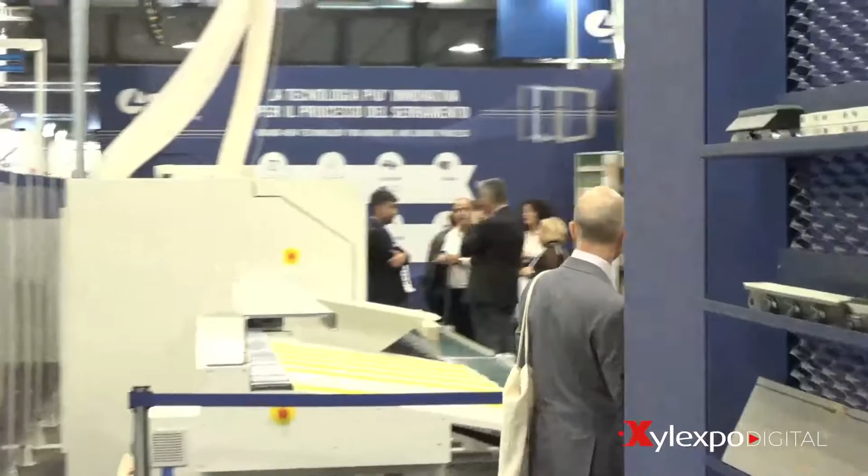We're here with Marketing Director Walter Biagi. Good morning, everybody. I've been working for 20 years at SCM and I'm a marketing manager for solid wood solutions. Let's go inside our booth.

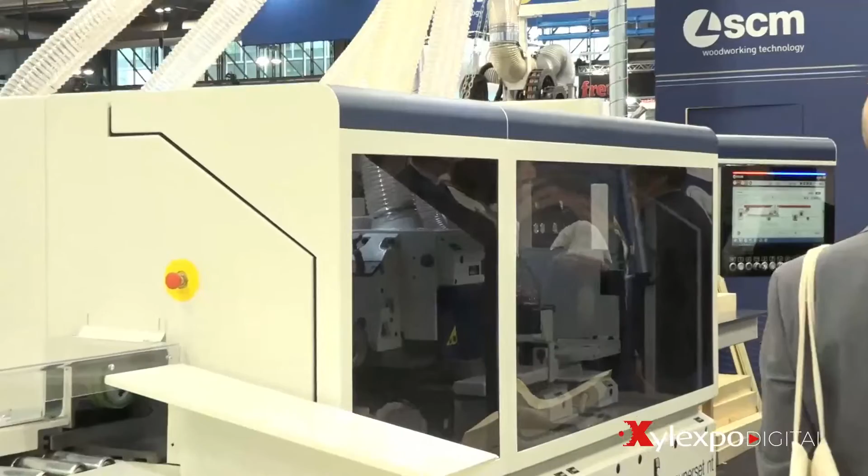We have here our first solution presented at the fairground. We're talking about planing. This is the model which is most sold, the Superset NT, so it's an interesting evolution. We focused a lot on ergonomics and flexibility of use.

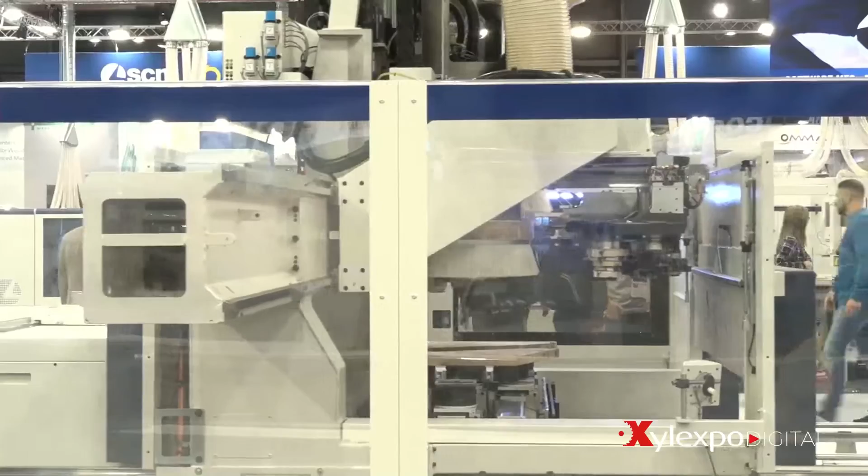It's not easy technology, so the setup must be followed constantly when setting up the machine. We've developed a number of functions helping this pathway, making the machine extremely intuitive and easy to set, with the goal to achieve the best possible result in terms of finishing, performance, and productivity. So this solution specifically...

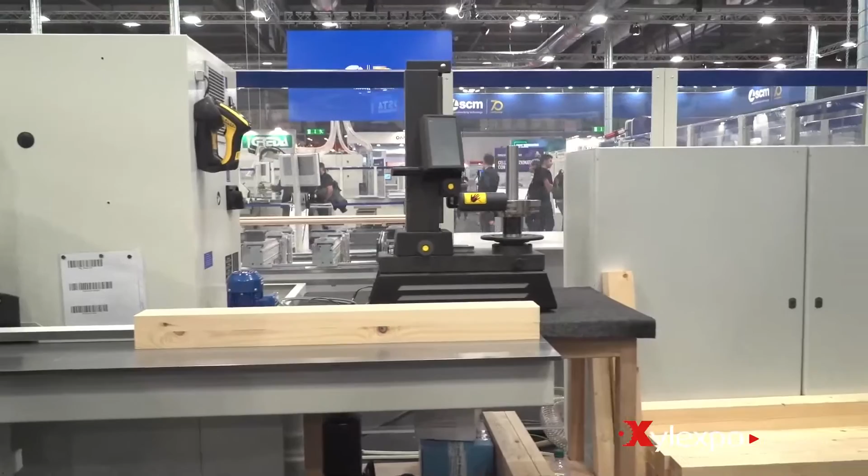From the moment when the tool is purchased, you can read its characteristics using this preset, which is found at the head of the machine. Once the main characteristics have been read, they are transferred directly to the supervisor, which is Maestro 4-Side.

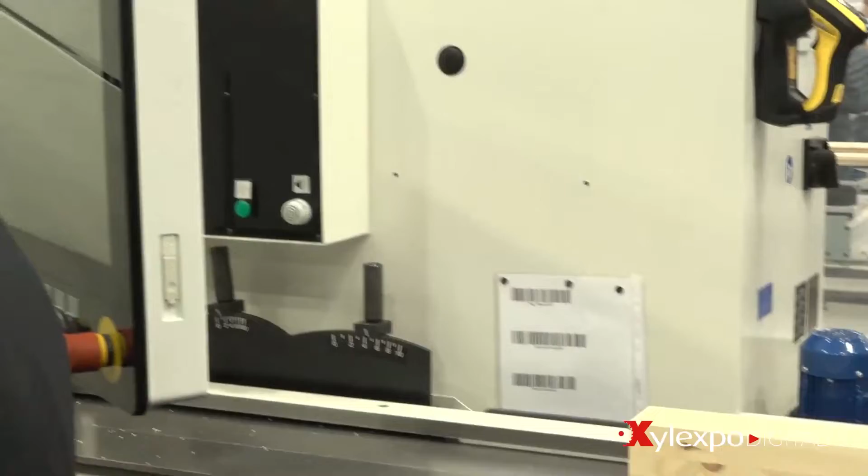It has the same user experience as the interfaces we use within the SCM Group, so they are extremely intuitive and easy to use. This is just to give you a taste of what intuitivity can be in the use of this machine. Next step, follow me.

So this line of products, machining centers, were thought for making chairs, but more in general, they're thought to meet design needs, because we see there's an interesting trend going. Customers increasingly ask to be able to realize design items, valuable objects, with important working volumes, major ones.

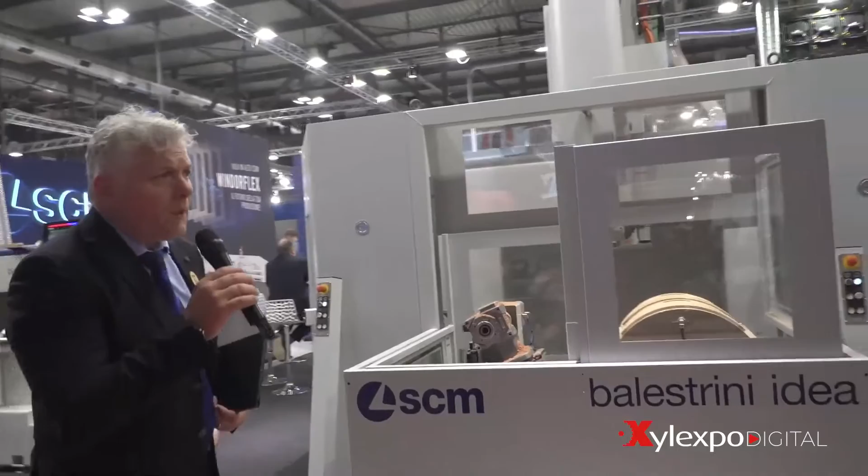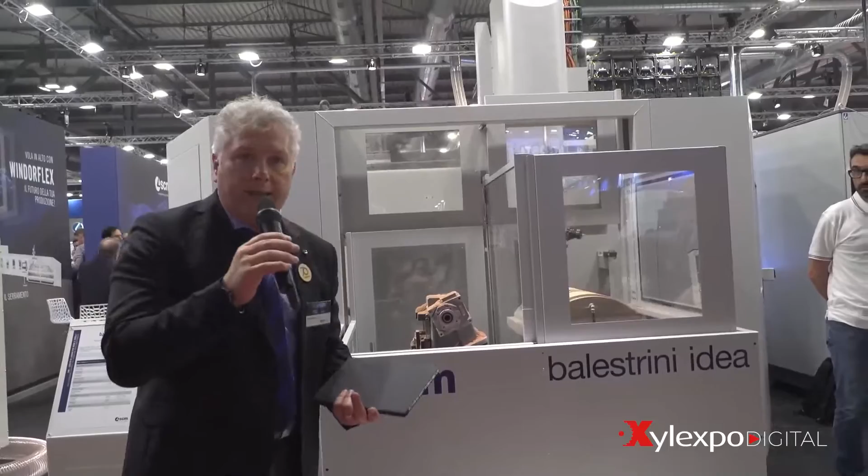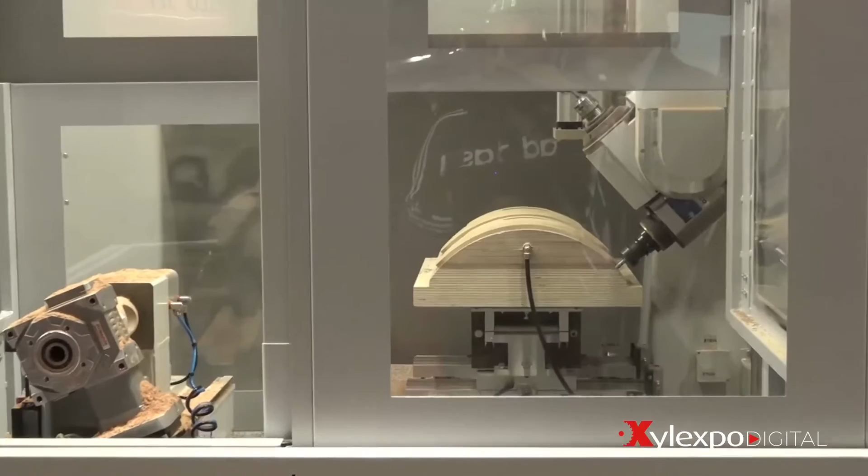This is Balestrini Idea, a 5-axis head with 3 exits, extremely flexible, and it's equipped to do two different wood processing tasks. On the one hand, it's the back of the chair, and on the other side we have a rotating head, so to make objects.

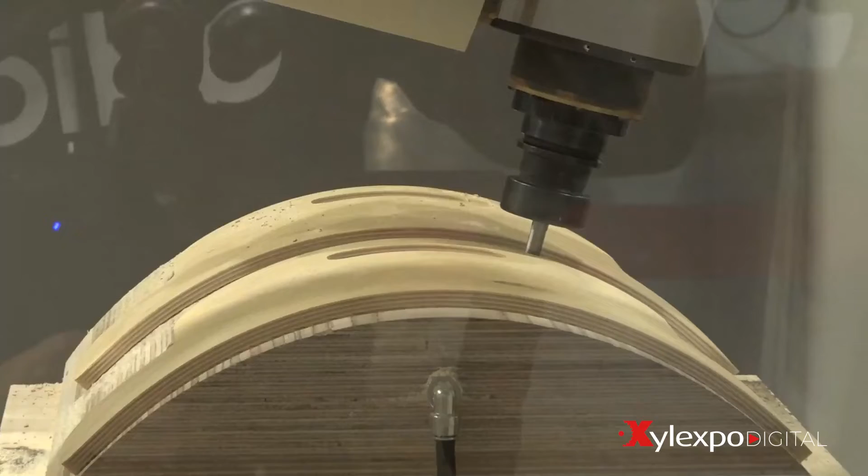This is a gadget, for instance, but you can make chair legs, so it's any kind of small furniture item. It is well appreciated for its compact size. But then there are areas where the runs are much more in terms of numbers.

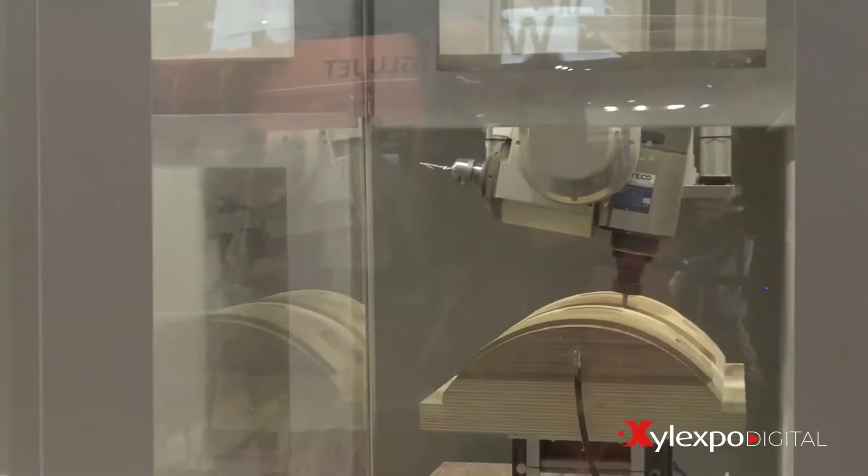We have a totally cabineted solution for major volumes, to make staircases, furniture items of 100 different kinds. So this is for craftsmen, really, craftsmen entering the CNC machining world for the first time.

Yes, it's like first purchase machinery, but whoever uses it still has to have a culture of woodworking. It has to be a craftsman with experience, and the craftsman's experience coupled with our solutions and software available on the market means they can program the machine very easily and transfer their own knowledge into the machine and software. So yes, it's still a CNC machining center, and it's quite evolved in its kind.

Then we can switch gears here. Here we have another machine, totally different from the previous one. It was thought for specific functions.

The PICO word, so it's a solution meeting a specific need, which is to make joints, like in the world of chairs, but the world of cabinets as well. When I think about doors, 5-element doors, I need to make joints between studs and beams.

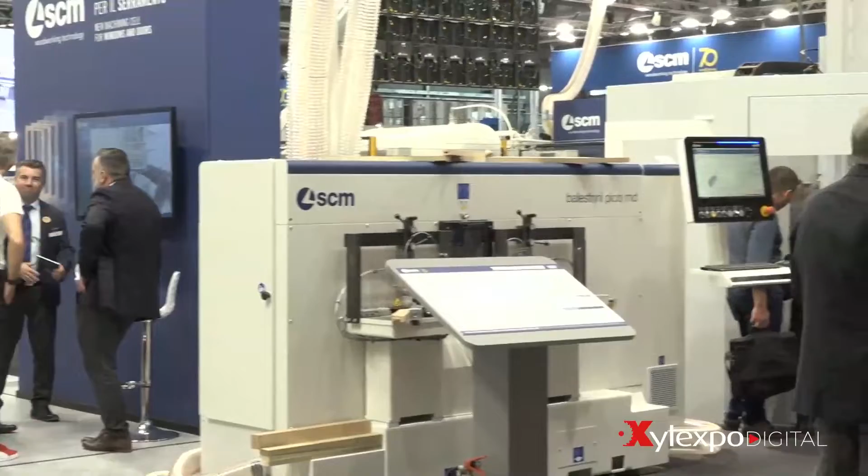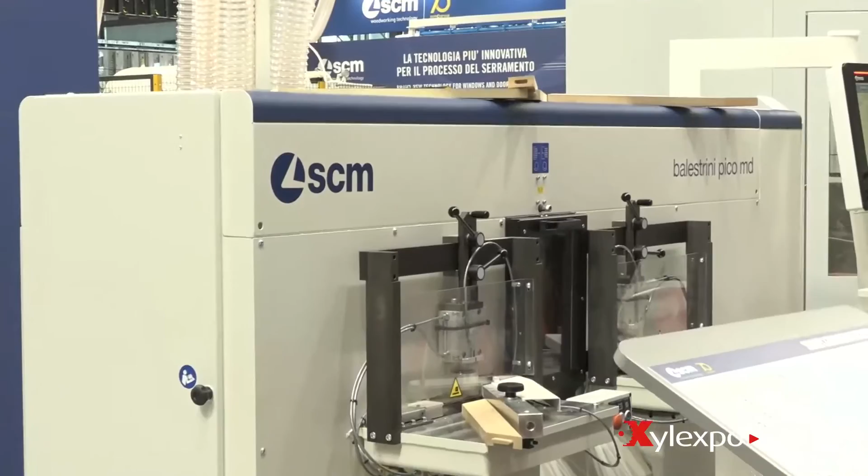I would conclude this tour for solid wood working, stopping here at this panel. This is where we present our latest innovation, a very important project that SCM Group has been investing a lot in over the last years.

A new machining cell for windows and doors, it's called WindowFlex, and it's conceived and thought for craftsmen and window manufacturers that need flexibility, but are also looking for a simple and fast solution to be able to transfer their purchase orders into a finished product.

This flexible cell was developed along 3 lines of direction. The first one was to have solutions, clamping systems that can allow you to fix the window in a solid, stable way, with excellent finishing and the same blocking system, whether we talk about European, Scandinavian or Anglo-Saxon windows, which are notoriously very different from one another. So this is the first point.

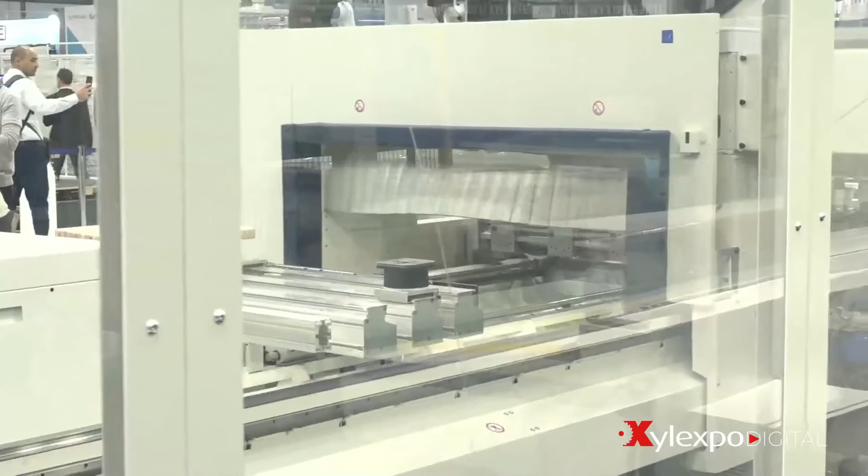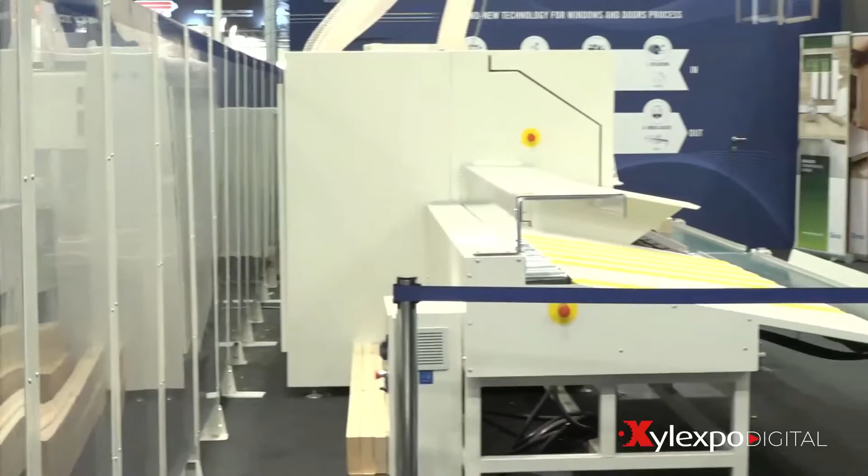So the entire first decade of the 21st century was dedicated to productivity. We want to go back to that history. We go back to our customers, but we now offer the natural evolution of that pathway. After 15 or 20 years of use of systems that have made history, now for the same customers, we have thought of a new solution, a flexible machining cell like WindowFlex.

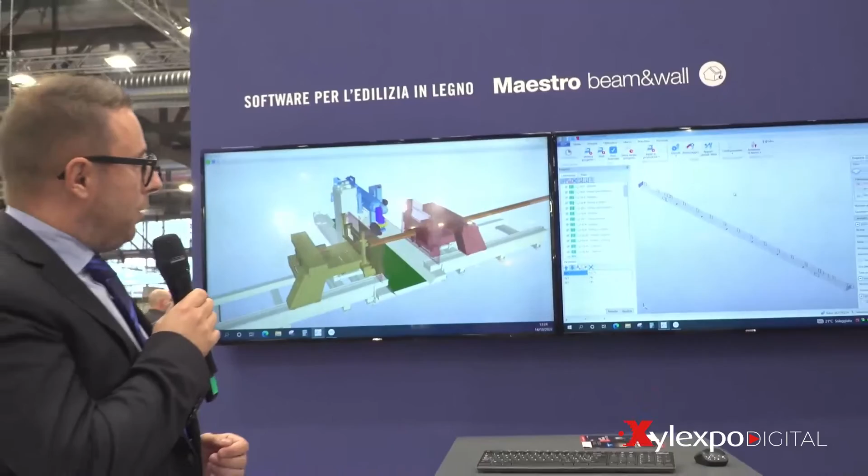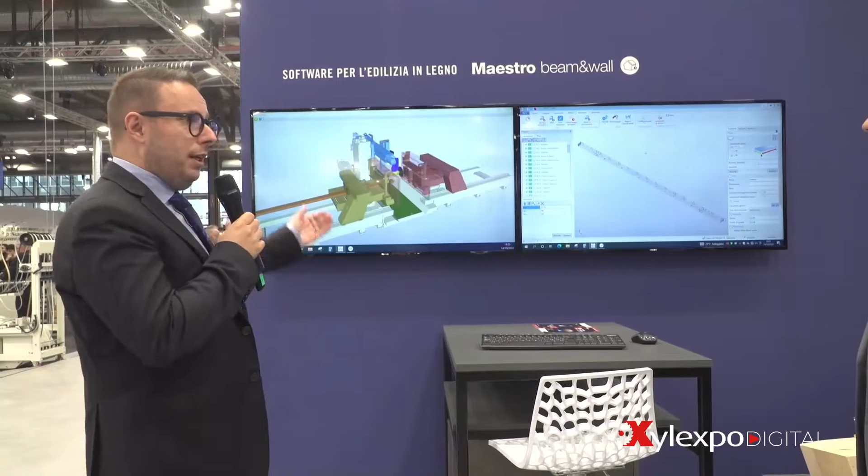This is the program interface used by our customers. So we have design features, a file is then exported - it can be automatically exported - and we can process the entire project. The programming occurs automatically. Here you can see the simulation of the workflow, of the working process that is then done by the machine. Anything that I have programmed in the software is actually problem-free when I get to the production phase.

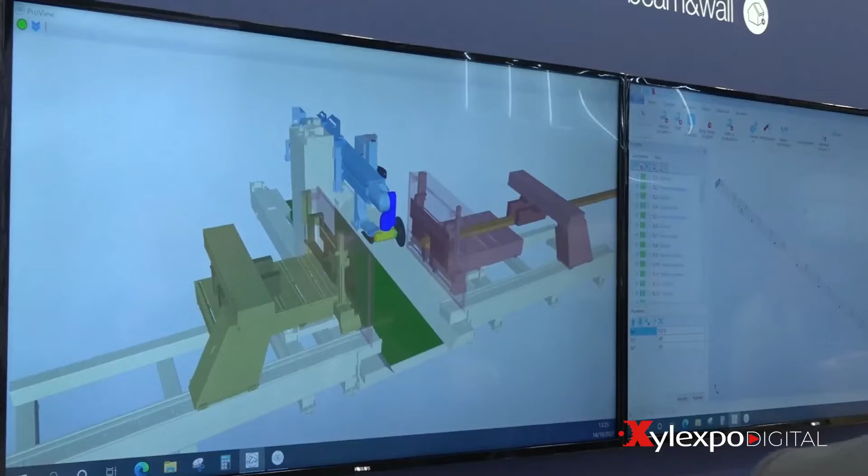This prevents any downtime of the machine. On the other hand, this system allows us to calculate better manufacturing times, and it helps to better manage all the production-related commitments.

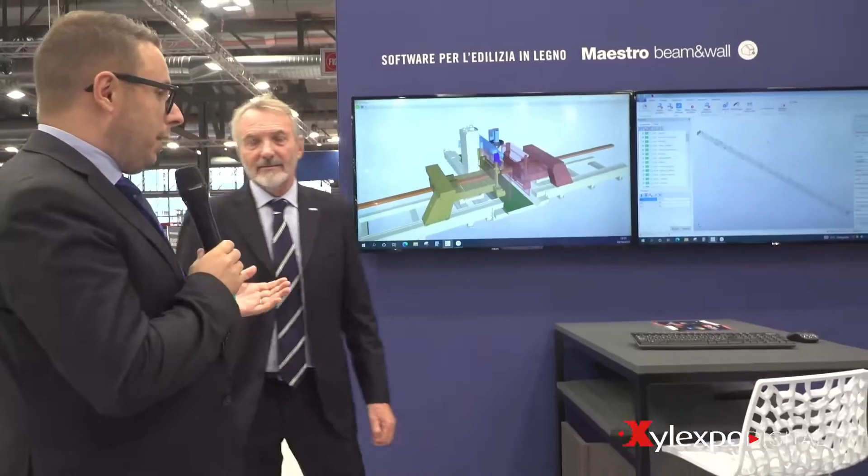What markets are you targeting, Italy too, with this new machine? Yes, we are also targeting Italy as a market. Italy does have a very long tradition - wooden-made roofs have a long tradition in Italy - but now there are new evolving markets. The North American market, for example, where we're really growing in high numbers. The utilization of wood for multi-story building is growing in North America, and this is extremely important. There is a strong push towards better eco-friendliness, and nowadays regulations allow buildings up to 18 stories high, so that's why demand is growing up to 18 floors.

And that's where we are going to record remarkable growth, hopefully not just in this market but in Europe too. Let's talk about France, for example. France has set some constraints on CO2 production, so building companies have to build with wood. And then there are also other markets that are important - we have the Asian market, with a lot of installations in Japan, which is still an important end consumer market for SCM.

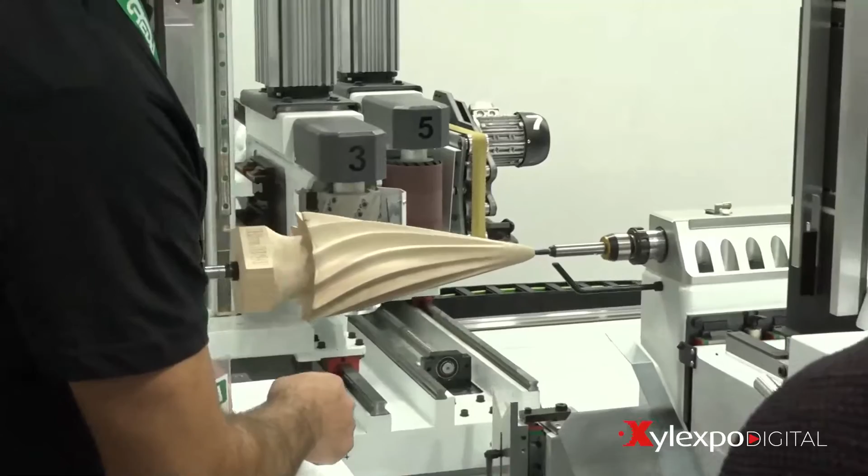Good morning and welcome to our booth. We're happy to be back live in person. Due to various reasons we couldn't be together, and I'm happy to see you back here. We have a Pocket V5, a lathe turning machine with 5 axes. Basically, several solutions for milling, cutting, and sanding are brought together into one single machine. It's a 5-axis machine. Let's get closer to our machine so that you can see it better.

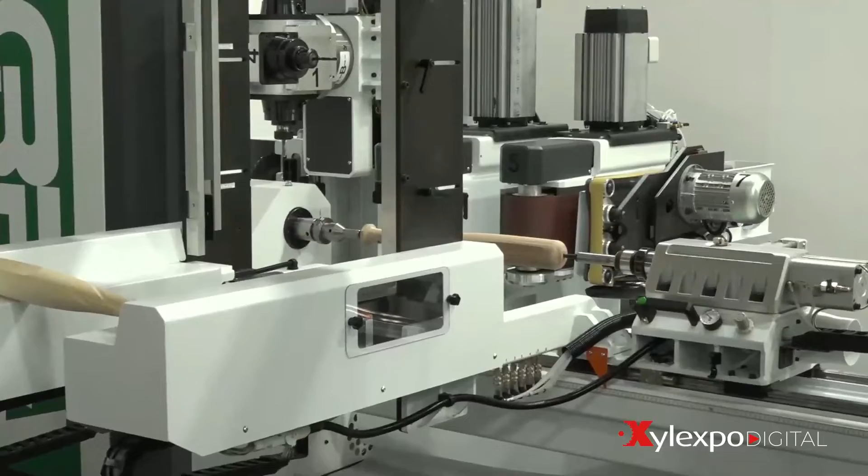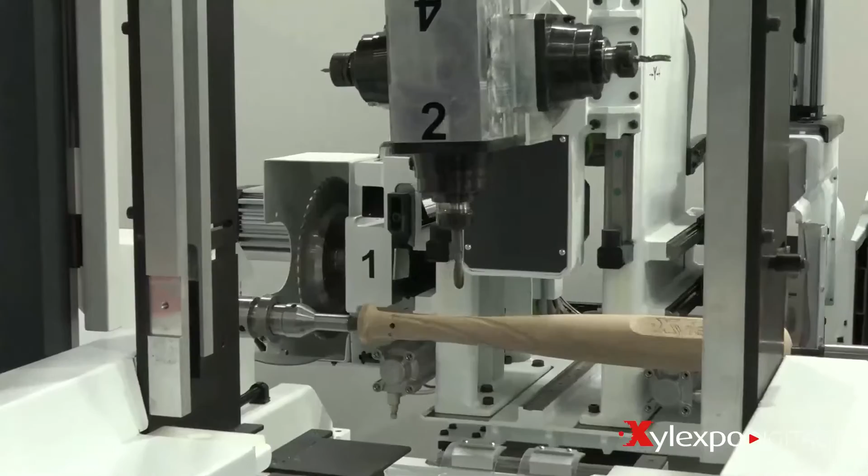This is a turning and cutting machine, 5 axes. So many different processes from cutting to sanding and other axis-based processes can be accomplished. It's a small working island where the operator basically watches over the machine for the offloading phase, and then the machine works automatically.

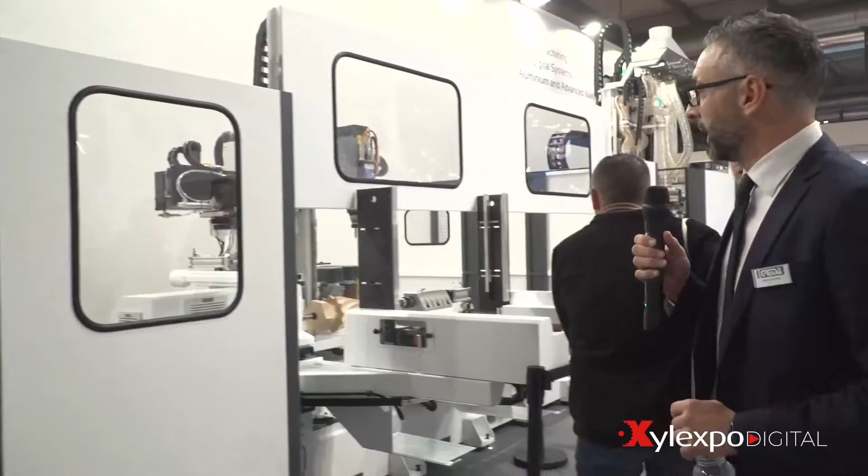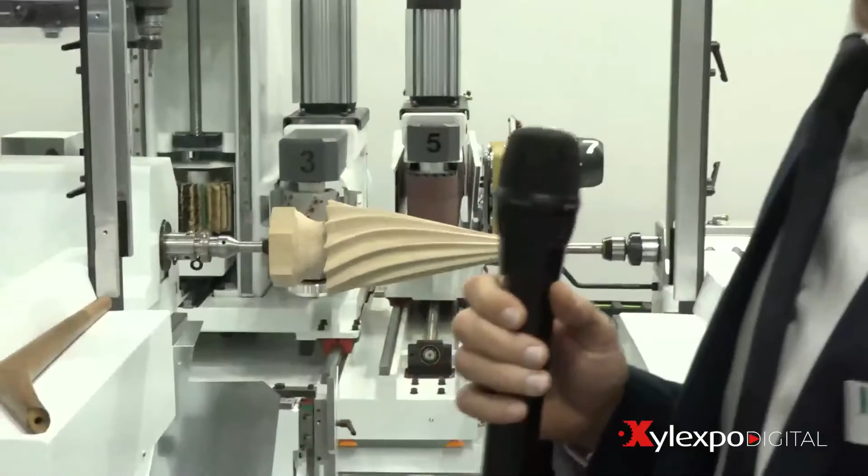Over the past few years, we've paid a lot of attention to the sanding process. This group has 3 sanding units. It's very unique in this respect. We have longitudinal sanding, brushing type of treatment, and a cross sanding process.

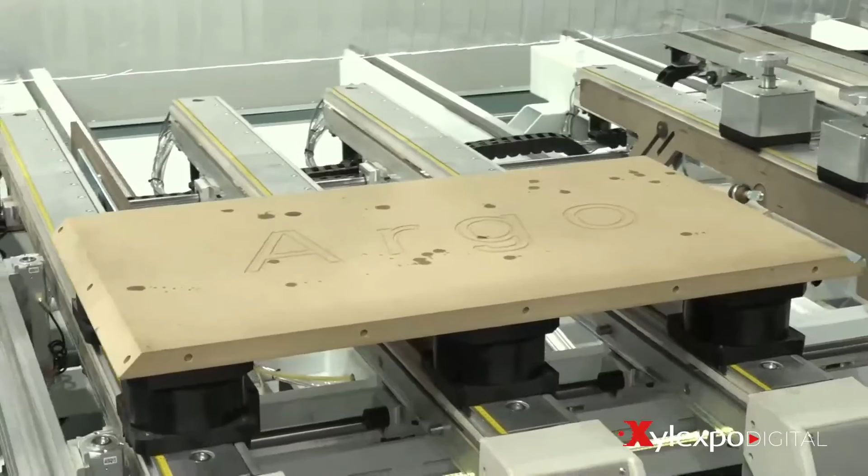Then we have another product, Argo G Max. This is a project which we developed both for the furniture market, panels, but also for those customers who need something different than a classical conventional piece of furniture. Customers that work valuable wood species, prestigious wood species. There is an automatic cleaning system of the plane.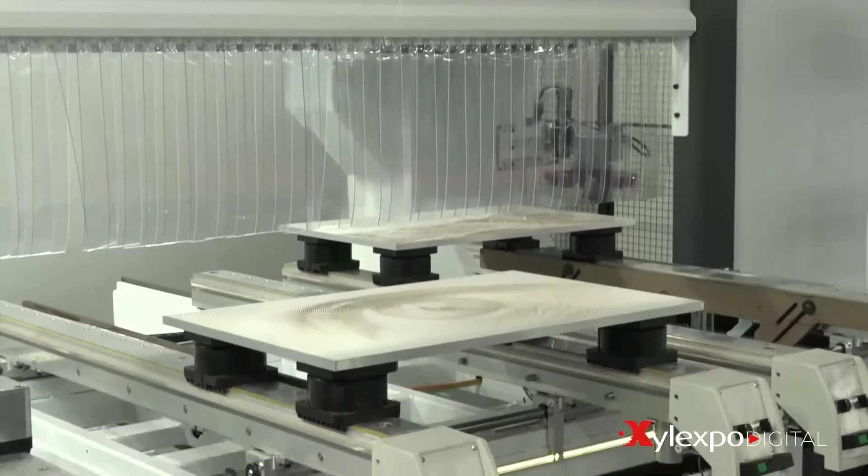There are tools that clean the base part of the machine. It removes the dust. It has several heads. We can also reduce the cycle time. This is one of the major novelties that we wanted to exhibit at Xylexpo 2022, and the response we are getting from our customers is very positive. They seem to be happy with it.

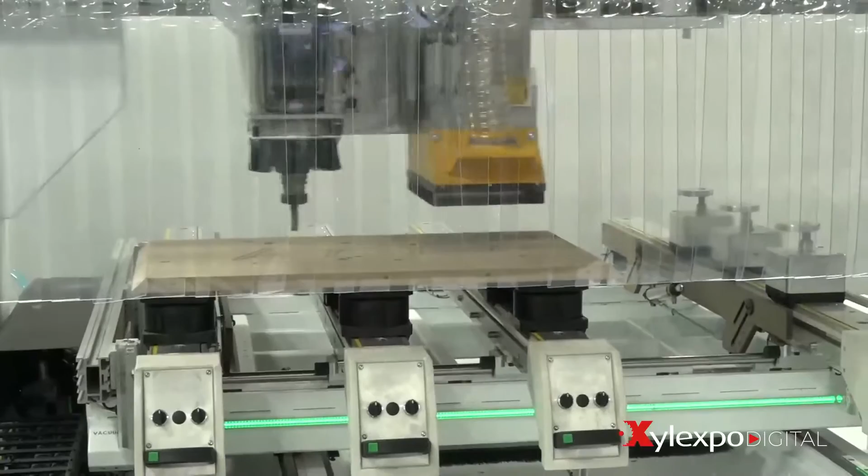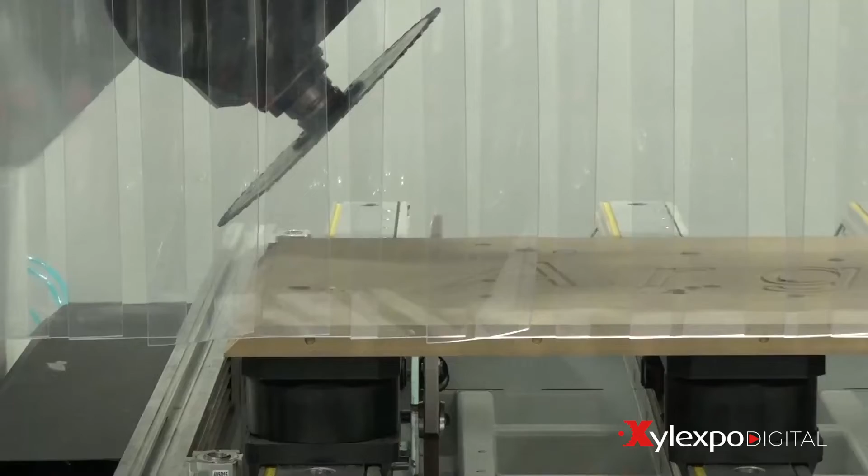So this machine can be used for panels, but also solid wood panels, correct? Exactly, that's the concept. There are 2 operator units and 5 axes, which are made of special materials, and we can perform large chip removal activities. So our machines are very robust, very strong, very resistant, and they ensure excellent working speed, high performance, and excellent quality. Thank you for this explanation.

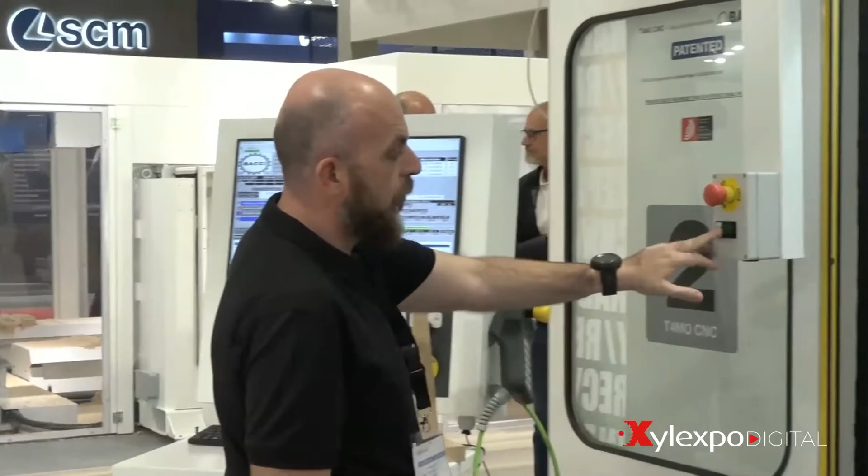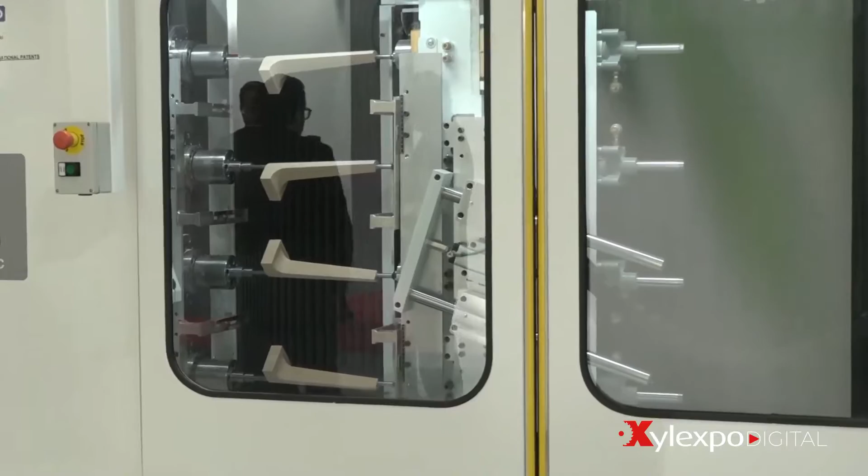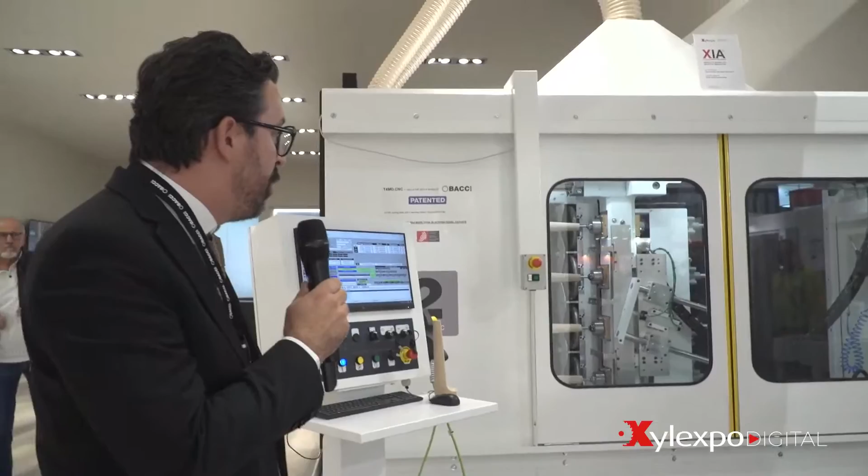But the big piece of novelty has to do with lathing and turning machines. We are presenting 2 machines that are running for the XIA Award, which we hopefully will win again this year. These are 2 machines that deal with turning and lathing processes in a different way. The first one is a lathing machine, a CNC turning machine with 4 spindles, so it can turn 4 pieces simultaneously, without copying them.

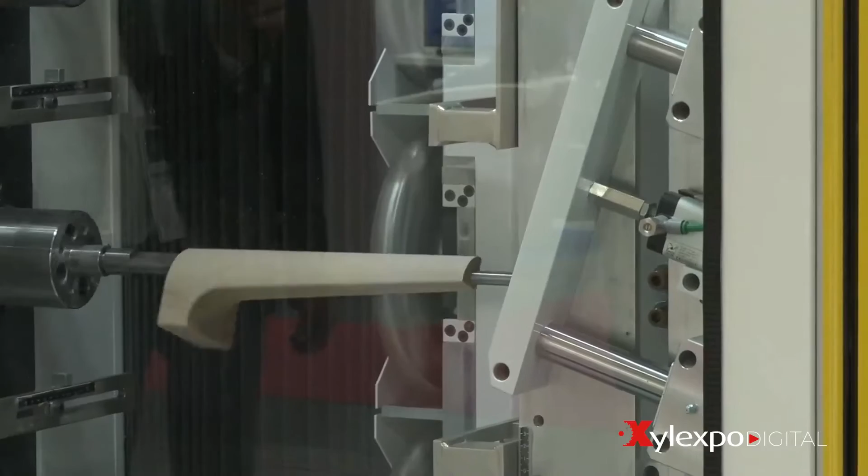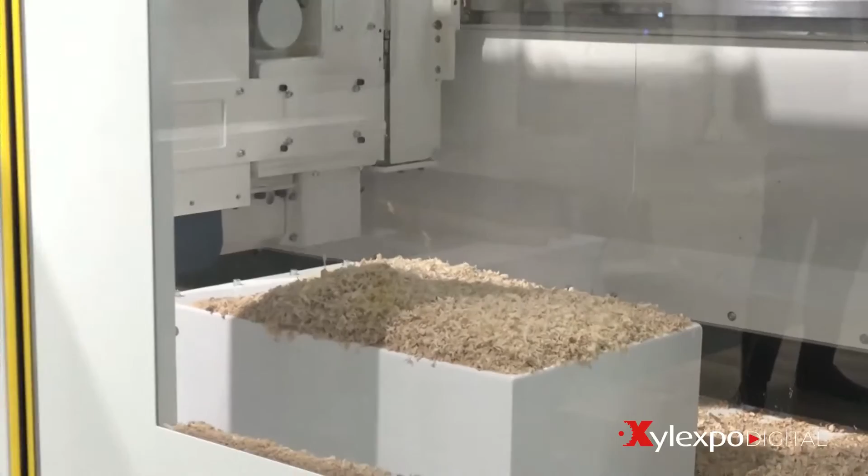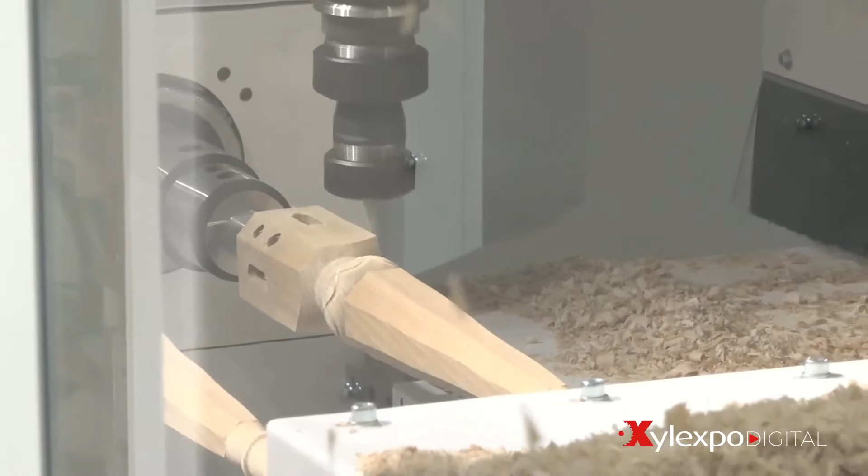So what is the typical end user of these machines? Well, I would say it could be third-party companies, small enterprises, but also large factories. These are machines that can process large batches, especially the 4-spindle turning machine, but also short or small batches, because the setup times are very limited, very quick.

I bet you have great expectations. Yes, we do indeed, and the first days of the exhibition were very satisfactory. We thought fewer people would visit us, but the first day we had a lot of attendance, a lot of visitors. The second day not as much, but today was a very good, successful day. Now we're on lunch break, so we're a bit less crowded. Thank you, Paolo.

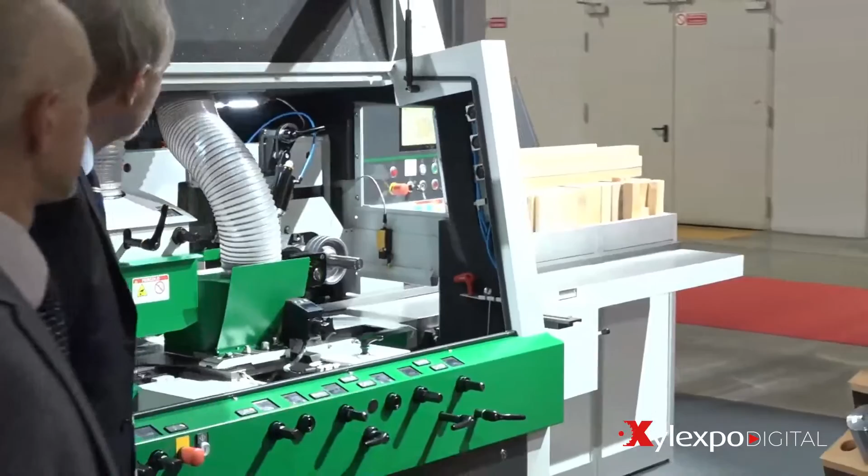One of the novel products for Xylexpo 2022 is this one, Profimat 30. We went back to a historical name of our machines, Profimat. We hadn't included it in our product portfolio in the past few years, but we've resumed it. It's very easy to use with the new touchscreen technology, and you can easily manage and control it just like a smartphone.

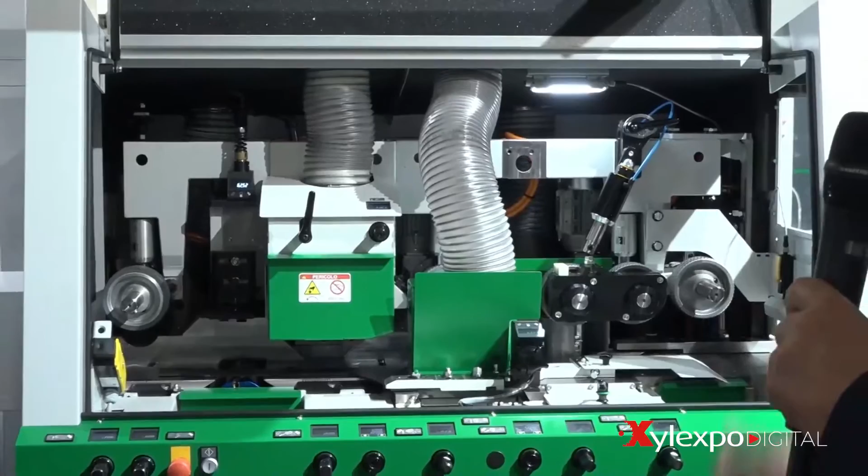It's a small-sized, flexible profiling machine on each side. Thickness and dimension are pretty compact. This is meant for small enterprises, artisans, craftsmen. Something I really care about is this machining center for doors and windows - I wanted it here at the exhibition, XS. This is a newly designed and conceived machine.

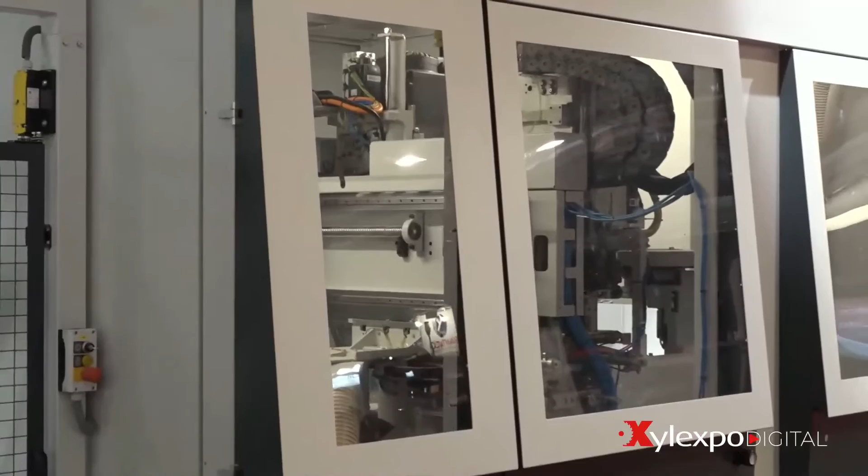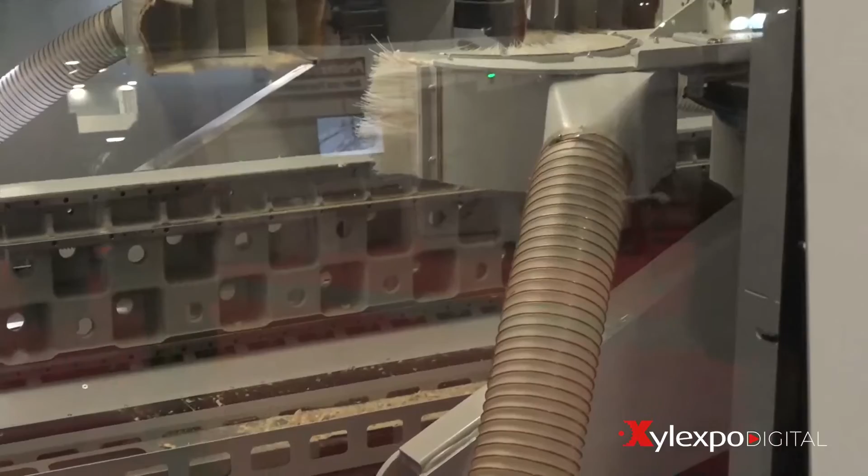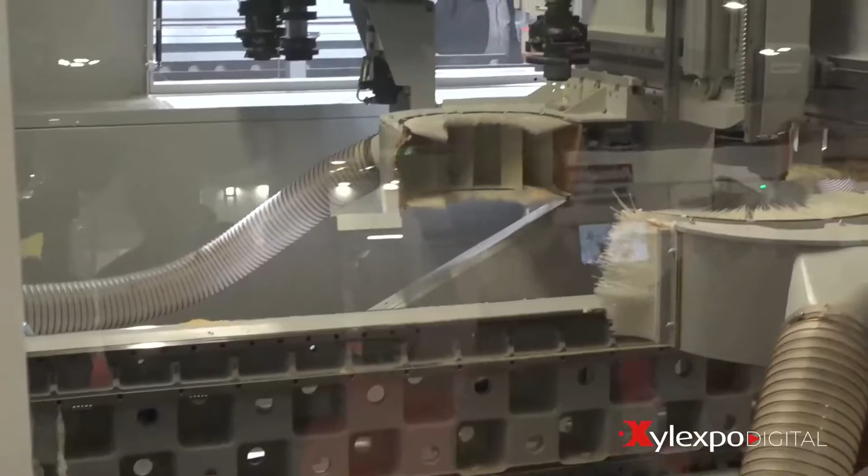The product name is Conturex. This machine aims at being very flexible in the production of doors and windows, with high productivity performance. You can make up to 50 or 60 finished doors and windows per shift. There are some technical innovations, such as the Z-axis with variable positioning, other axes, a 5-axis engine, so you can really cover an entire spectrum of processes we couldn't accomplish with previous models.

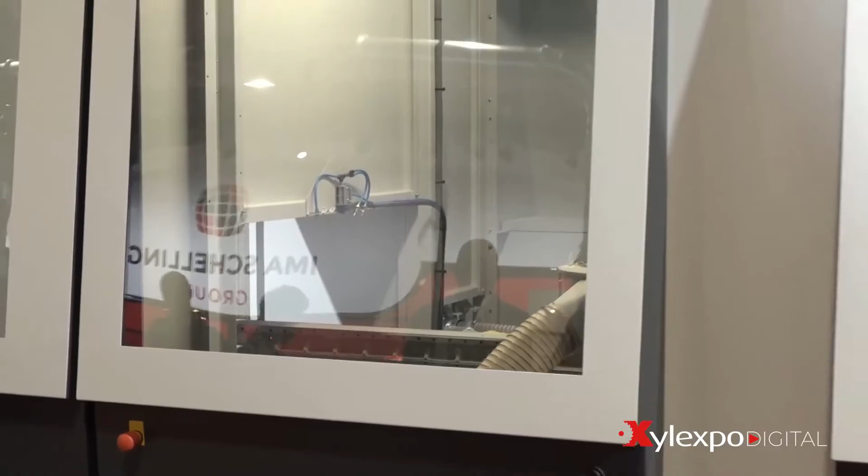It shows a new outer box, more easily accessible for maintenance and cleaning operations.

So you basically cater to the needs of small artisan enterprises with the Profimat up to large companies with this one. So you're dealing with the Italian market - I'd imagine this type of machine is sold and marketed in Italy. Yes, I'm General Director of Weinig Bozen in Italy, so I'm in charge of the entire Italian market.

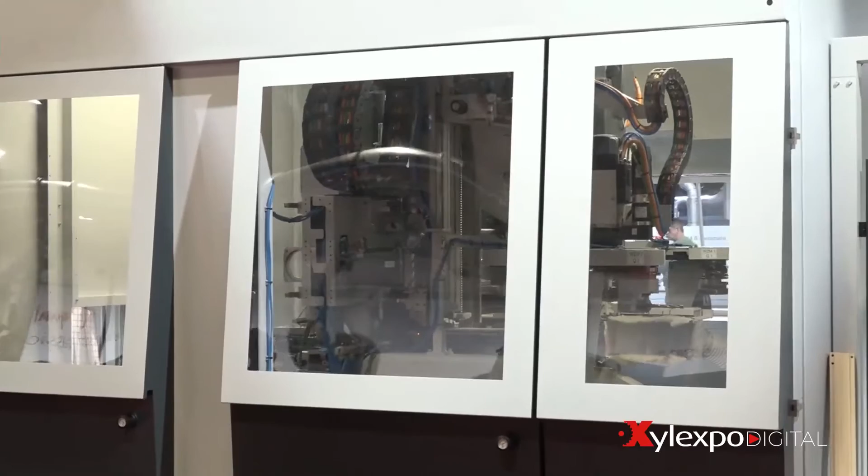Specifically, this machine is already sold to an end customer in Italy. Several other machines displayed here at the booth will be delivered to our customers in Italy, and yes, we cover the needs of small enterprises up to large industries. Our booth here covers a gross surface area of 1,100 square meters, so we couldn't exhibit industrial ready-to-use complete plants, but we do have them in our offer.

Thank you, Fabrizio, thank you for this explanation. It's very informative - Weinig really covers the entire spectrum.

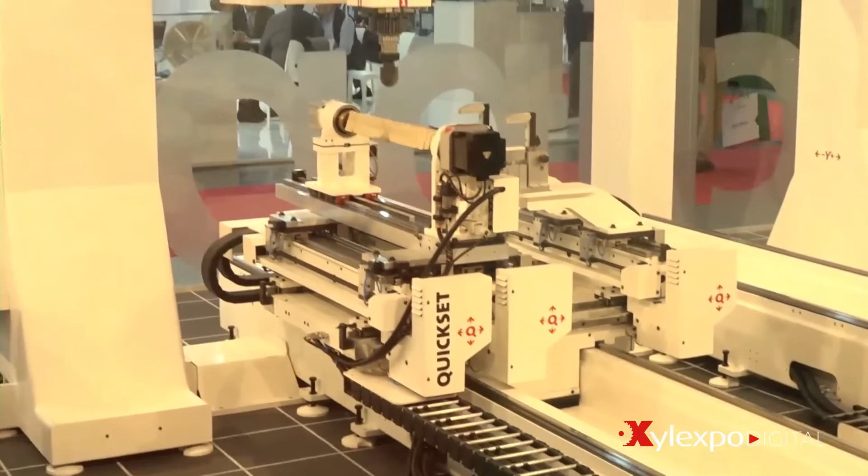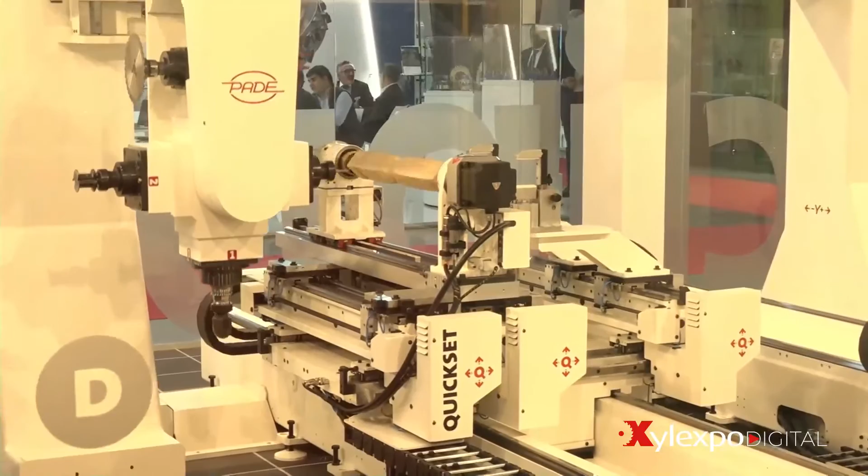Thank you. We have a machining center with typical equipment for chair component manufacturing, and the new thing is the lathing unit with an automatic withdrawal system. It solves the limit of traditional machining because it automatically picks the heads, so that saves time. This is the new concept, and from here we can work on numberless additional applications.

That's what you're seeing here. For the rest, it's a 5-axis setup with 12 position tool changes, and the tool is controlled for length and diameter by means of a laser check system.

And what is this machine? What's the target of this machine? Serial manufacturing, because it has to be elastic and flexible. Yes, the must, today's must, is flexibility.

So automation, automatic movement of all positionings with relative easiness or simplicity, and a user interface that is as intuitive as possible. With this setup, we believe we have achieved the best compromise.

The machine, it's beautiful. Thank you, yes, we worked on the aesthetics side as well. That does matter nowadays - compliments, many compliments. Thank you, thanks a lot.

What else? As far as we are concerned, we are satisfied because everything has already exceeded our expectations, so everything coming next is beyond, really. Thank you, we are happy for you.